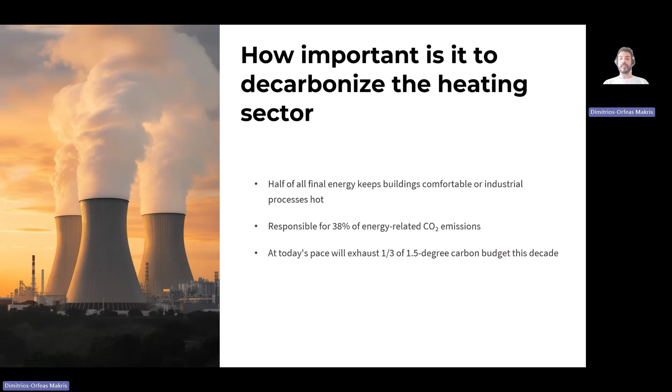There's also a hard-nosed security angle. Europe's 2022 gas shock reminded every policymaker that dependency on imported molecules can empty a treasury overnight. Finally, consider public health. Replacing coal and oil burners with clean heat cuts urban particulate pollution, saving tens of thousands of lives a year. So whether your priority is Paris, geopolitics, or clean air, the verdict is the same. Heat must be decarbonized.

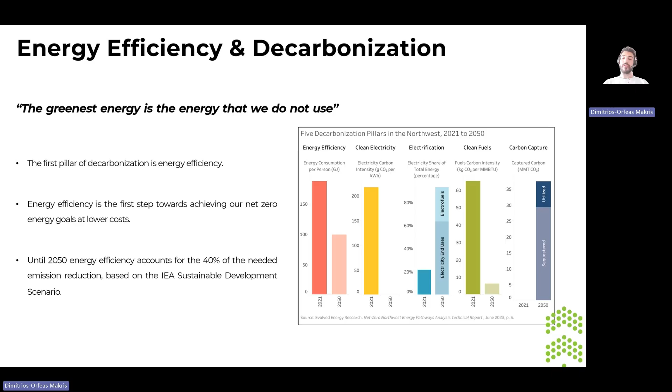Every national roadmap from the IEA to your local municipality eventually sorts its actions into the same five baskets. Energy efficiency is the first step towards achieving our net zero energy goals. So, shrink demand with insulation, air tightness, and smart controls. The cheapest kilowatt hour is the one we never need. Until 2050, energy efficiency accounts for 40% of the needed emission reduction. Moving on to the next pillars.

The second one, electrification. Run high efficiency devices, mostly heat pumps, on an increasingly renewable grid that swaps 90% efficient gas boilers for heat pumps that deliver 3 or 4 units of heat per unit of electricity. Third, renewable thermal supply. Harvest energy directly as heat. Sunlight on rooftops, geothermal brine under cities, or ambient heat lifted by large heat pumps.

Fourth, low carbon fuels and carbon capture. Think biomethane, green hydrogen, and CCS bolted onto the furnaces we simply can't electrify yet. These options are pricey, so we save them for the hardest niches, especially high temperature industry.

Fifth, thermal networks and storage. Modern district heating grids move large volumes of low temperature water, letting one clean heat plant decarbonize thousands of buildings overnight and soak up excess wind or solar in big hot water pits or other thermal storages. Everything you will hear from now on is a real world application of one or more of these five pillars.

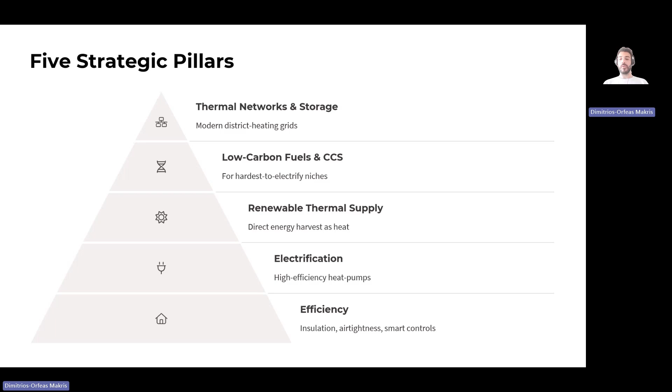Let me give district heating just a quick spotlight because although only about 9% of global building heat travels through networks, those networks can decarbonize whole neighborhoods in a single policy stroke. So the classic model, one big combined heat and power plant pushes 90 degrees water through insulated mains, buildings take what they need, and cooler water returns for reheating. The drawback is obvious. Hot pipes leak energy and the fossil fuel burned at the plant still pollutes.

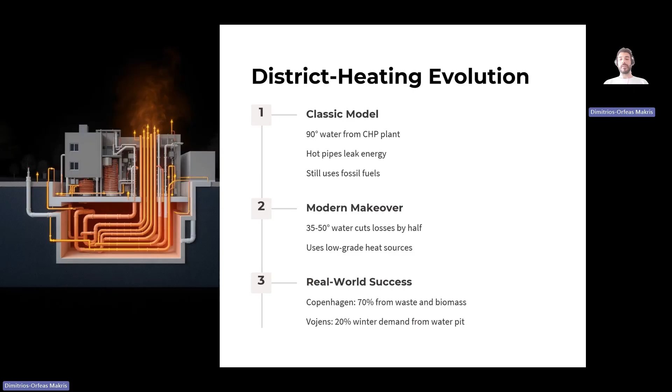So by dropping supply temperature from 90 down to 50 or even 35 degrees, losses are cut in half. Copenhagen, for example, already supplies 70% of its district heating from waste to energy and biomass CHP, topped up by city-scale heat pumps running on offshore wind. Vojens covers the size of 7 football pitches. That's all we need today on big networks. The deep dive comes in our next presentation for district heating systems.

Storage turns variable renewables into dependable heat. Most renewable heat sources are asynchronous with demand. So solar collectors peak at noon in July. Radiators scream for help at 6 a.m. in the morning in February. So without storage, a clean district grid still needs a fossil backup boiler for the coldest week of the year. With storage, that backup shrinks or disappears, and we run the whole system harder, cheaper, and cleaner.

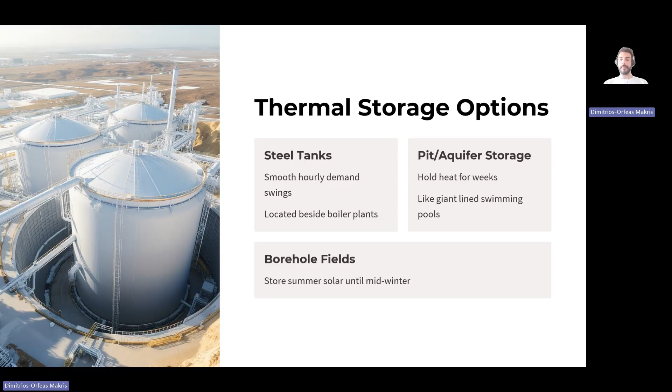Now zoom to the single dwelling. A modern air source heat pump looks like an air conditioner outside and a cylinder inside. For every kilowatt hour of electricity it consumes, it delivers 2.5 to 4 kilowatt hours of heat, even on a frosty night, because it is moving heat rather than making it.

Ground source units cost more upfront because you need a borehole or a garden loop, but they reward you with steady year-round efficiency. 2024 was the crossover year in Europe. Heat pumps outsold gas boilers for the first time. 5 million units. Wider adoption turns the electricity grid itself into the furnace room, one that gets cleaner every year as wind and solar grow.

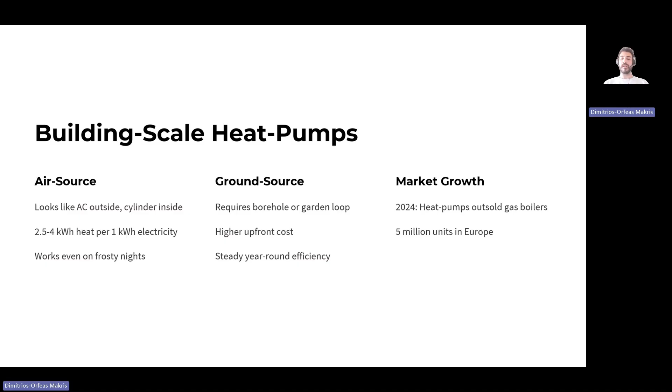Not every building can host a heat pump tomorrow. Maybe the electrical panel is maxed out or noise limits apply. Pure electric boilers and resistance heaters fill those gaps. They are simple, wire in, heat out, zero on-site emissions. Their climate impact rises or falls with the grid. When your utility is 40% coal, resistance heat is dirtier than gas. When the grid is 80% renewables, it's close to zero carbon.

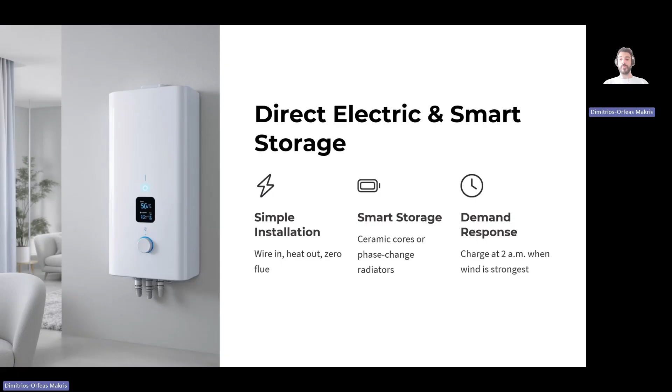Pair that heater with a smart ceramic storage core or a phase change radiator, tell it to charge at 2 a.m. when wind is strongest, for example, and suddenly you have demand response that helps stabilize the grid instead of stressing it.

The roof and the garden still matter. A 6 square meter solar thermal array can supply half of a Mediterranean household's hot water needs over a year. Rural homes beyond the gas grid lean on modern pellet boilers. 85% efficient, automated feed, and if the pellets are certified, almost net zero on the carbon ledger.

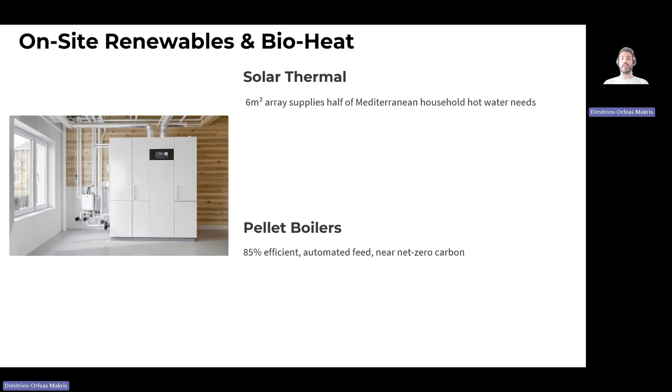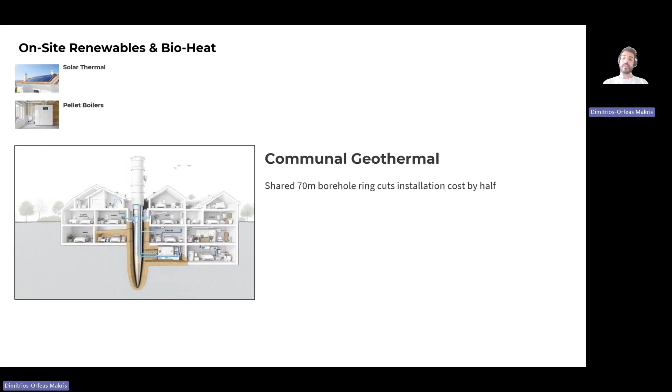Some suburbs are drilling communal shallow geothermal loops. Every house plugs a small heat pump into a shared 70-meter borehole ring, cutting installation cost in half. These options don't compete with heat pumps, they complement them, giving households several paths to the same clean heat destination.

Now, certain factories and very cold climate district grids still need blast furnace temperatures or instant peak capacity. Here, we reach for low carbon molecules. Green hydrogen can flame at 2000 degrees without CO2. Pilots in Sweden and Austria are already melting iron ore with hydrogen direct reduction, proving the furnace chemistry works. Where pipelines already exist, upgrading them to carry biomethane keeps legacy industrial burners alive without fossil gas.

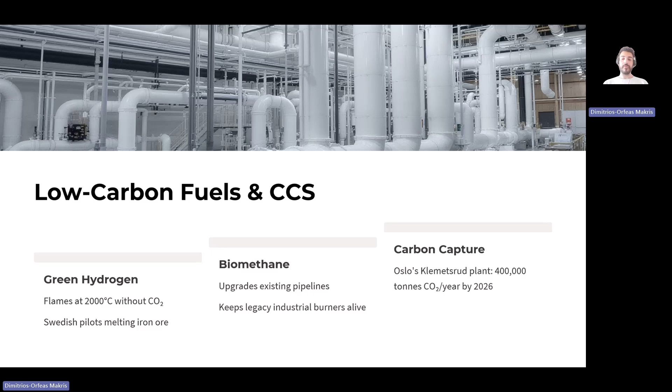And when none of that is cheap enough, carbon capture steps in. Oslo's Klemetsrud waste-to-energy plant will trap 400,000 tons of CO2 a year starting 2026. These solutions are the costliest in the toolbox, so we reserve them for the genuinely hard-to-electrify corners.

Remember Pillar 1, efficiency? Wrap a 1960s house in modern insulation, add triple glazed windows and an airtight front door, and you can cut heating demand by 50 to 80%. Drop radiator temperatures to 55 degrees, or better yet, install underfloor loops, and every low carbon supply option, that heat pump, that district loop, suddenly performs better.

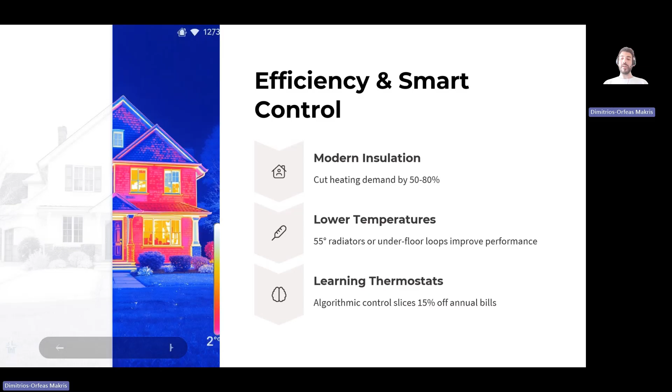Finally, top it with a learning thermostat that preheats when wind power is abundant, and coasts during evening peaks. In trials, simple algorithmic control slices 15% off annual bills without the occupants lifting a finger.

Technology only moves when policy clears the runway. A carbon price north of 100 euros a ton makes gas boilers the expensive option overnight. Many countries won't wait. The Netherlands bans fossil-only boilers in new homes next year. Germany follows for replacements by 2028.

So here's the staircase. By 2030, we need half of space heat emissions gone in developed countries. Achievable if heat pump sales keep doubling every 3 years and no new fossil-only boilers are allowed. By 2040, almost every district heating network should run below 60 degrees and at least a third of high temperature industrial heat must be electrified.

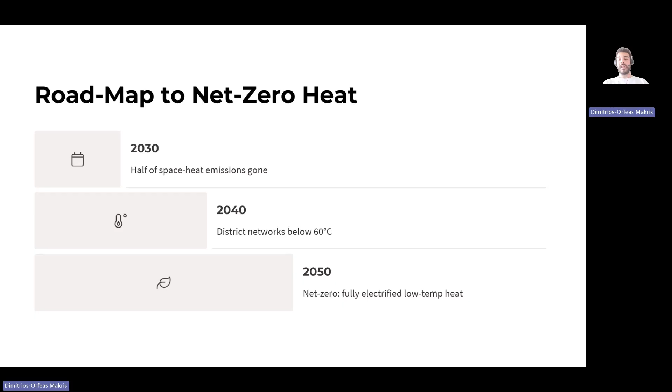By 2050, the destination is net zero. Low temperature heat, fully electrified, hydrogen or CCS mopping up the industrial extreme, and seasonal storage turning summer surplus into winter comfort.